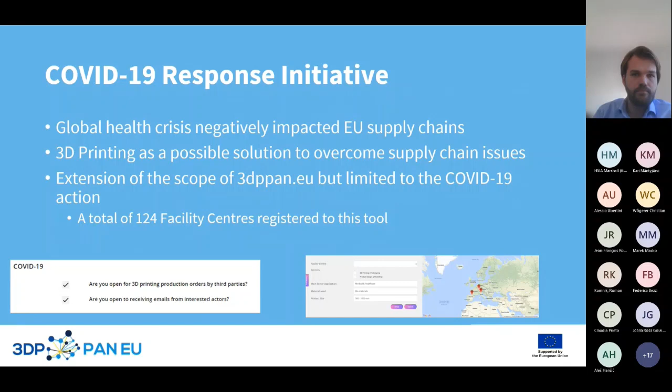As mentioned, we also launched and managed a call for SMEs to financially support SMEs in their industrial projects. We launched the call itself on the 15th of April and closed on the 31st of August 2020. So we were open for about 6 months. The aim of the call and the projects themselves was to test and validate a number of industrial demonstration 3D printing projects in different application fields. At the time of closure, we had received 30 applications, of which 10 were financially supported following an evaluation process.

It's noteworthy to mention that the SMEs active within these projects are coming from 5 different member states, and the facility centers who are part of their implementation consortia, who are also registered on the 3DP PanEU platform, came from 10 different member states. So all in all, with these 10 projects, we had a nice geographic distribution and representation from organizations based in different countries. You'll be receiving more information on some of the projects that have been supported through 3DP PanEU. But just to give you some insight, some of the application fields included the agricultural, automotive, aerospace, manufacturing and construction sectors.

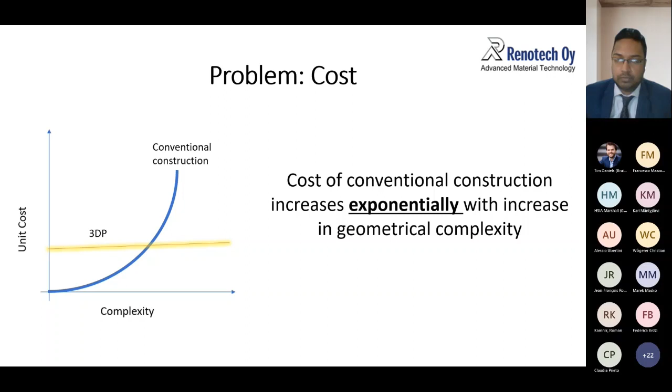Given these three challenge areas, we need some sort of solution. We believe part of the answer is construction 3D printing, but with smart materials. Compared to subtractive methods, you can produce items with minimal waste. For certain items, the combination of smart geometry and smart materials gives you completely new products with new functionalities.

Another example is bioreceptive materials, which can act as a carbon sink and bring down the overall carbon footprint of the finished products and items.

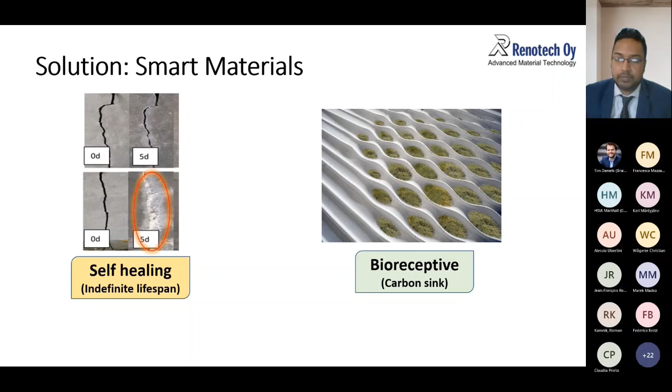So what we have done under this framework in this project, first of all, I'd like to highlight that we created a lot of proprietary designs. Since they're proprietary, I cannot share them openly. However, for the sake of this presentation, I can share some things in terms of design and the final products.

The printer which was under consideration was a robotic arm one, and the final items were marine items which had complex geometry and specialized material. These were bioreceptive, meaning the design had ecological and bioreceptive properties, as well as the material having advanced functionalities.

Some of the use cases we are aiming at are artificial reefs and shore walls. These are some pictures you can see. Of course, we have not produced them ourselves, they have been taken from the internet, but this is what we are aiming into, the marine applications, for instance.

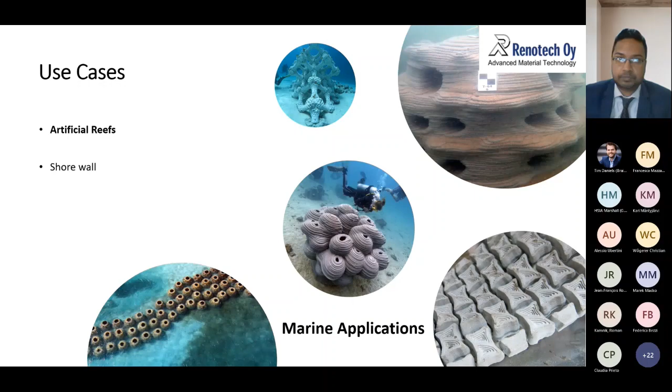In the future, we want to develop our terrestrial application, for example, making theme park units. We have gotten very good, creative designs, and also small office buildings, pillars and other things, but this is for the future.

So the vision and the project traction. Our vision is to become a leader in specialty construction 3D printing in Europe with focus on smart building materials. As we are an advanced material technology SME focused on specialty construction, we believe this gives us a unique value proposition in this new era of Industry 4.0.

To give you a brief idea how the project proceeded: the 3DP PAN program started in January, and by the end of May we had created a new business case incorporating the previous slides you've seen. By that time we had the majority of the designs, specifically the bioreceptive designs and other hybrid manufacturing items, already received. By the end of September, we reached TRL 8 for the marine items, so we can already get started.

So our team, the key leadership people are, for instance, me, I'm the project manager and technical lead in this area. We have Mr. Bob Talling, who is the owner and the managing director. And we have Rika Danielsson, the lady, who is a production manager. In total, our company has about 14 staff and we are growing.

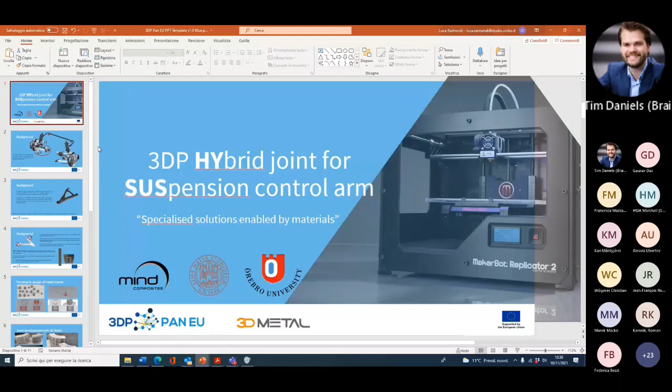Good morning, everybody. Let's try to share the screen. Hope you will be able to see. Okay, so good morning, everybody. My name is Luca Raimondi from the University of Bologna. I was involved in the project 3DP HYSUS for the demonstration of a multi-material component, that is a suspension control arm for the automotive industry. Co-partners in these activities, for which MIND is the SME, are Orebro University and the Facility Center 3D Metal.

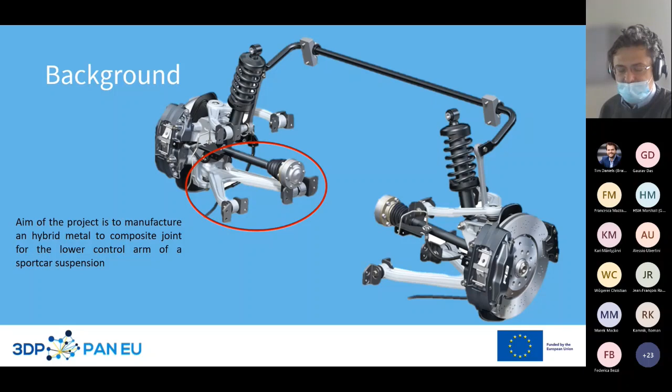So basically the background and the aim of the project was to manufacture a hybrid metal-to-composite joint to be integrated into the lower control arm of a suspension for a sport car. The background: the company, the OEM, actually produced this component in aluminium, but to improve the drivability of the car and in order to achieve a weight reduction of the unsprung masses, carbon fiber reinforced plastic has been recognized as a good candidate for metal replacement.

And according to a feasibility study performed by the OEM, this weight reduction can be achieved quite easily. Basically, this control arm is already produced and is already mounted, the version in carbon fiber, in several cars already manufactured.

Basically, in both aluminium and CFRP control arms, the steel bushings are press-fitted into the seats that are the holes presented in the control arm. This operation is crucial because the connection between bushings and the control arm is obtained by friction only. For composite this is quite tricky because this operation may induce fatigue, wearing, as well as corrosion in the assembly.

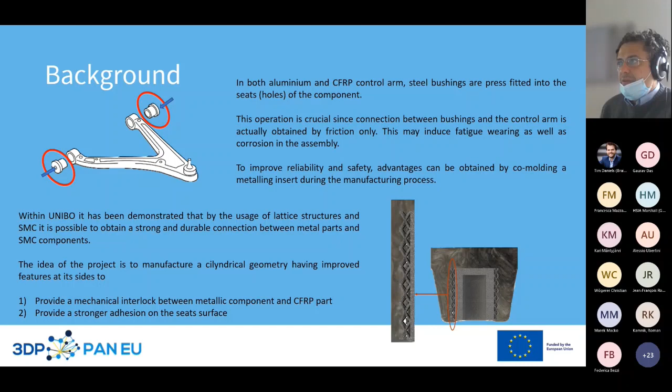We have developed new design tools for designing lattice structures on real automotive metal inserts based on a parametric design approach.

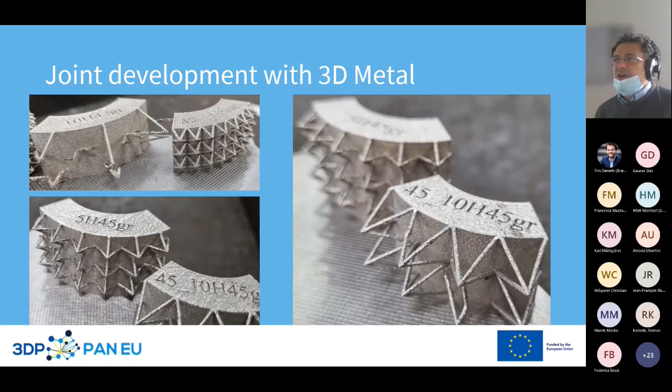Thanks to the joint collaboration with our partner, 3D Metal, another facility center involved in the project, whose task was to print the metal insert, we were able to understand the major limitation of this technology with regards to the application it was designed for. By performing this joint development, we have achieved some results in qualification of the process and the defects that are actually the bottlenecks to a widespread diffusion of 3D printing technology in the automotive industry.

We were able to embed these defects already in the design phase in order to achieve a strong resistance despite the presence of defects.

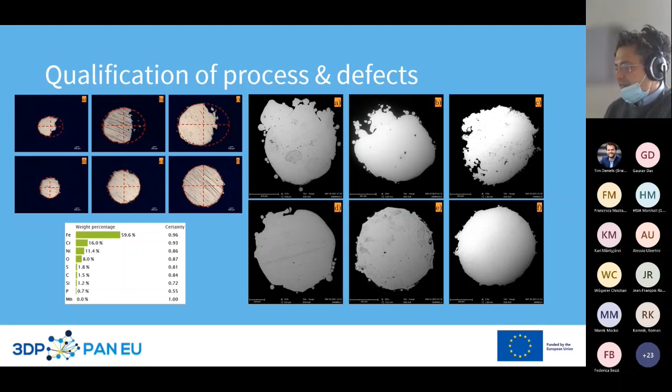We have performed some simulation of the infiltration process using commercial tools, and we have proven that our design is really interesting for the application and is feasible from the technological point of view.

Unfortunately, due to some issue in the supply chain, the pre-preg was only received yesterday. So basically, the project was not able to fully demonstrate the achievements up to now. However, we are confident to conclude everything in the next weeks.

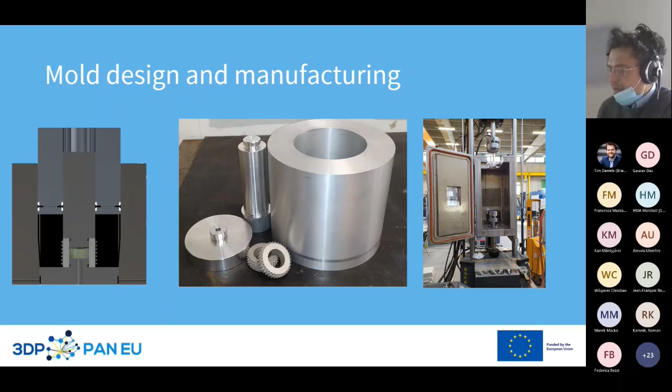By means of the computer tomography that will be conducted at Örebro University, we will also be able to understand the major limitations of 3D printing technology when used for manufacturing hybrid metal-to-composite joints, and to understand which failure mechanisms will dominate the joint while loading.

Therefore, this will be very interesting for scaling up the technology and surpassing some obstacles that exist in the automotive industry, which are mainly based on some concerns about 3D printing technology. So thank you very much for the attention.

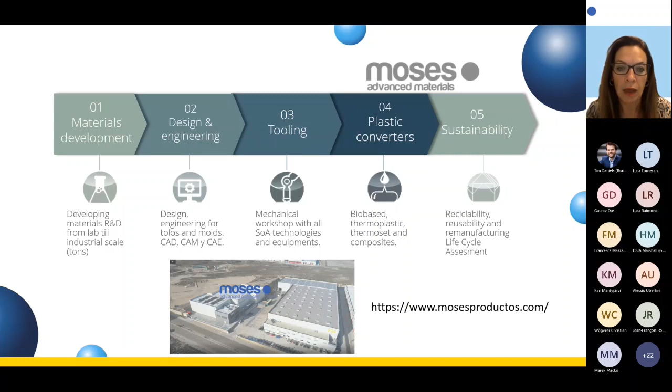Okay, we go directly now to the issue of our case. This is a problem that our team saw some years ago. You can see here how our regional government in Aragon funded a project in order to analyze the risk of fires caused by agricultural machines during harvesting times. Okay.

We can see, for instance, here a video that perfectly shows us the impact of this kind of accident in the field. We have here as well some reports coming from the University of Zaragoza, University of Navarra, and a private foundation, MAPFRE, that were our main starting point in order to conceive the concept of the product that we finally developed.

In Spain alone, we have 28,000 combine harvesters, and I'm mainly focused on 3 regions: our region, Aragon, Castilla y León, and Castilla-La Mancha. The main origin of fires is the cutting bars, with 31%. The ignition temperatures of the residues accumulated in the machine are in a very wide range, 250 to 340, depending on the size and the thickness.

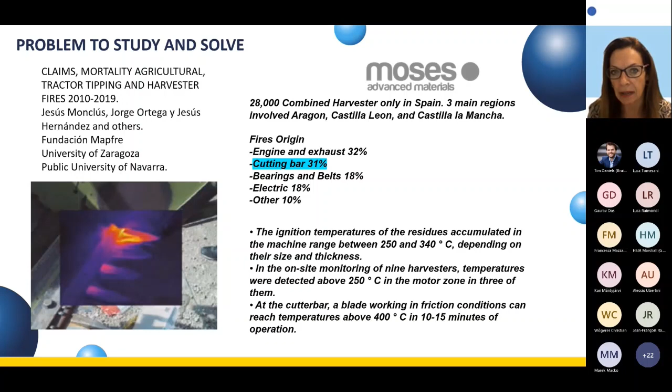And we notice as well very high temperatures in the motor zone, mainly in three zones, and mainly in the cutter bar, like this piece. We have very high temperatures, around 400 degrees during operations of 10-15 minutes. More studies about forest fires in Spain during these years.

And finally, we found a way to have a proof of concept in order to check if we could print a part directly, okay, from the file to the product using 3D printers, to check that it's enough for the mechanical performance that we need. We didn't have a successful result, but we learned a lot about the way to produce a new concept of plastic product instead of metal during the project.

Basically, AGRIAM consists of using metal additive manufacturing technologies to manufacture injection molds for producing plastic parts with conventional processes like injection molding for the agricultural machinery sector. Moses needs to respond to this high-impact market need by manufacturing small batches in order to check if the performance of these highly customized thermoplastic products meets the needs of the project.

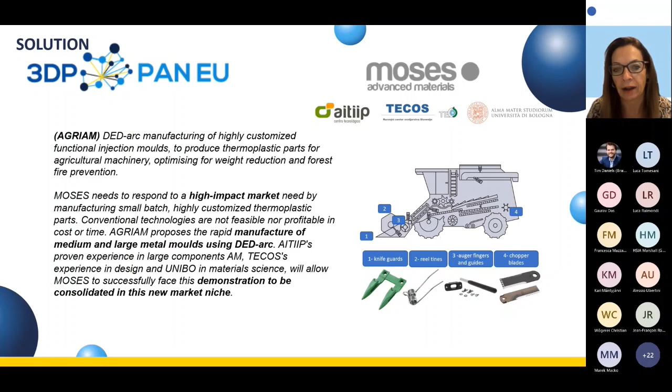Conventional technologies are not feasible nor profitable in cost or time. So AGRIAM proposed the rapid manufacturing of medium and large metal molds using direct energy deposition, DED arc. Of course, together with our partner centers, in this case, we work with AITIIP, TECOS and UNIBO, TECOS in Slovenia and UNIBO in Bologna.

And we developed these 8 activities, from the product redesign to the mold design for this AM manufacturing technology. We generated the trajectories and printing program for this case. The 4th activity was to design the different elements of the tool in order to be manufactured with this hybrid manufacturing, combining DED arc and subtractive technology.

Finally, we prepared the tool, adjusted it, finished it, and went directly to the injection trials in order to carry out the production of small batches with the selected thermoplastic material with a very high amount of fiber in order to be aligned with the mechanical needs. Finally, of course, we tested these samples and these tools with mechanical tests and with the different materials used in these batches. And we prepared as well a life analysis, mainly strength, robustness, and durability with 1000 cycles.

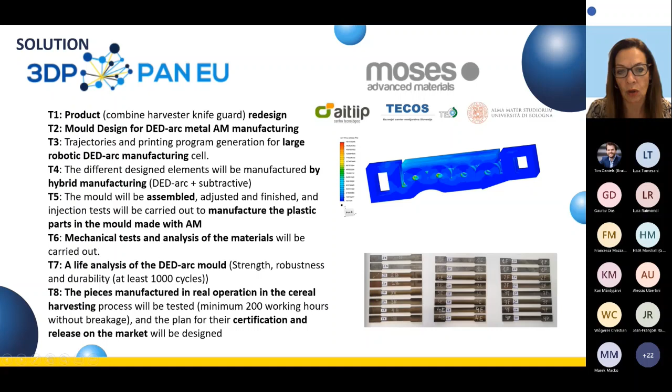Finally, as the real proof that it is a very good solution, we prepared parts in a real operation scenario in cereal harvesting processes at different sites, okay? And finally, we reached a plan for the certification of this new product, and we are now connecting to the market to have this product ready for next year.

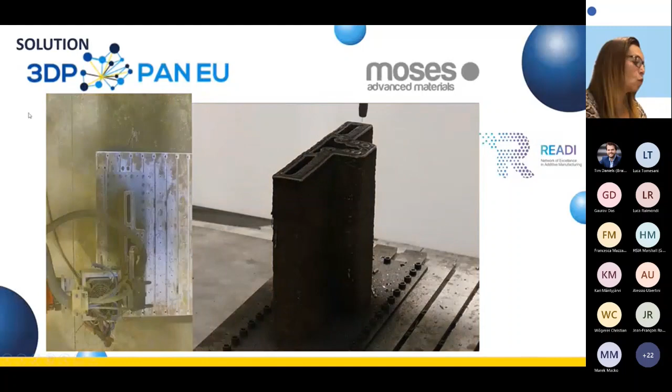In this video, we can show the production of this part of the tool, preparing this tool to produce the injection of the parts. Here you can see as well a sample of one of the parts of the tool. This was the first trial that we had.

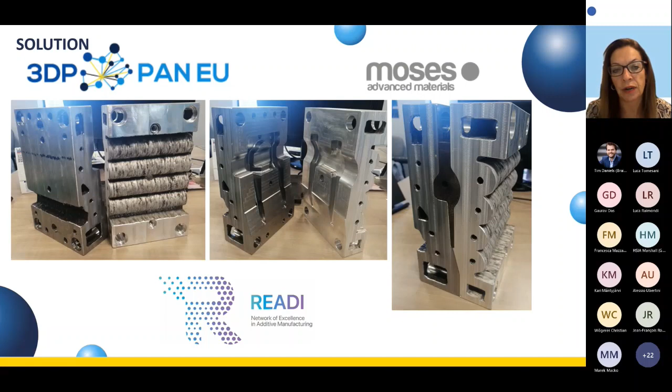Okay, and here you can see some pictures of the male and female part, the both sides of the tool, designed and manufactured by WAAM technology. Finally, you can see here as well the part of, we put the tool in the injection mold machine. As you can see, all the connections for the cooling process of the part inside the tool and the machine.

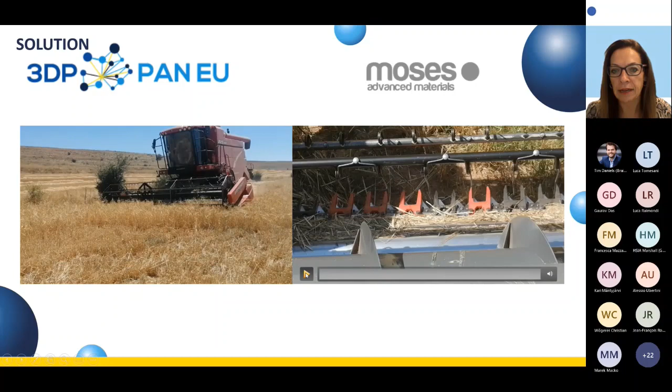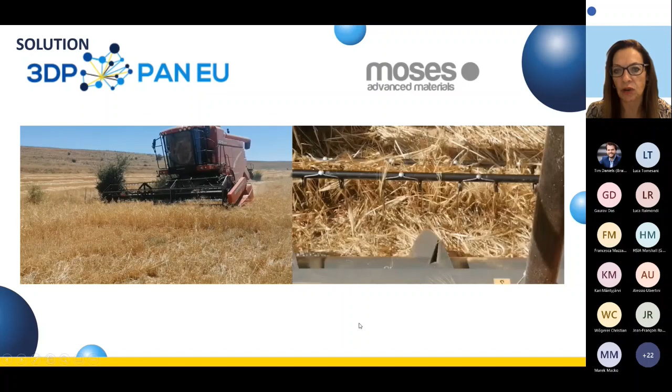As you can see, the mechanical efforts that we get in this manufacturing process, in this process of harvesting. You can see here some pictures of the parts that we implement in these machines. As you can see, we only replace some parts, mechanic parts, metal parts, not all the line. You can see in the middle a complete line, but in other cases we proved as well the combination between the conventional ones and the new parts that we prepared in this project.

Finally, I would like to thank, of course, this project, the 3DP PAN EU support that was essential to develop these parts, this solution for a real need. Very fruitful cooperation between AITIIP, TECOS, and UNIVO, thanks, of course, to all the teams in these facility centers to develop this solution, this new process, this new product. New knowledge creation, very good point as well, and of course, new research and development opportunities for the near future, and to optimize this product in the market.

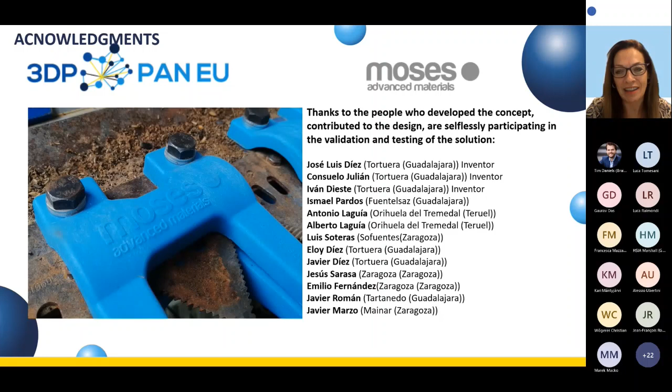Of course, a list of our testers, the people that test these parts in a real scenario. Thank you very much.

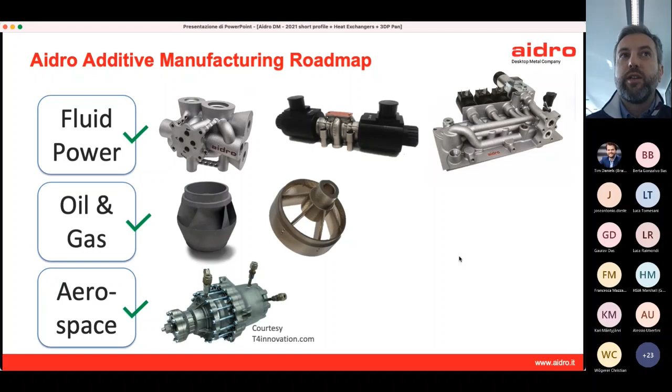So we defined a sort of roadmap for additive manufacturing. As mentioned, we're mainly focused on the use of additive manufacturing in fluid power, but also in oil and gas and aerospace. The idea behind is that we can use the advantages of additive manufacturing in order to introduce innovation to very consolidated and standard products like the valve that you see here in this picture.

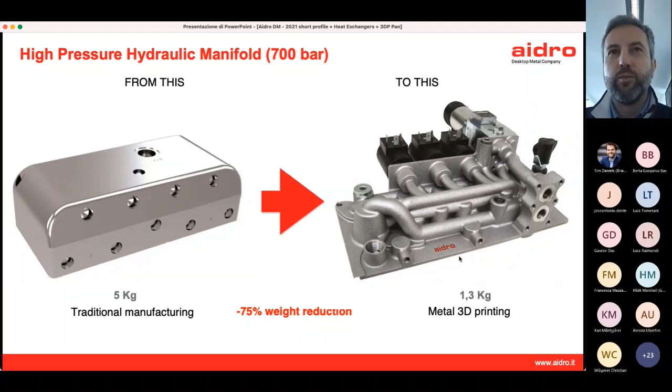Through additive manufacturing, we prove that it's possible to reduce weight, increase the performance, and have a series of advantages, in general for very niche applications, where there is a high added value and a customer that is keen to pay for the extra costs normally related to additive manufacturing processes. For example, this is another case of application for a hydraulic manifold that has been completely redesigned starting from a hydraulic scheme and has been adopted on a racing boat.

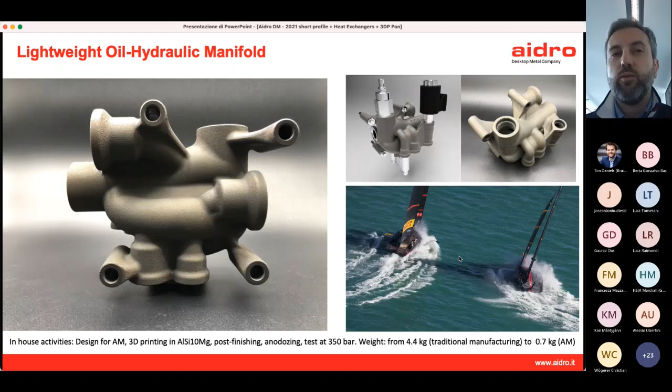Weight saving was crucial, so we proved that by using 3D-printed aluminum, the performance of the manifold was very efficient and the weight saving was important. Of course, weight saving also goes with the reduction of CO2 emissions, which is, I would say, a very fashionable theme recently, but we proved by a study that it is really possible to reduce the CO2 footprint through additive manufacturing, because on one hand we reduce weight and on the other we reduce the number of components.

And we can also think about the digital inventory, so reducing the physical stocks with the files. And this is something that is becoming more and more relevant.

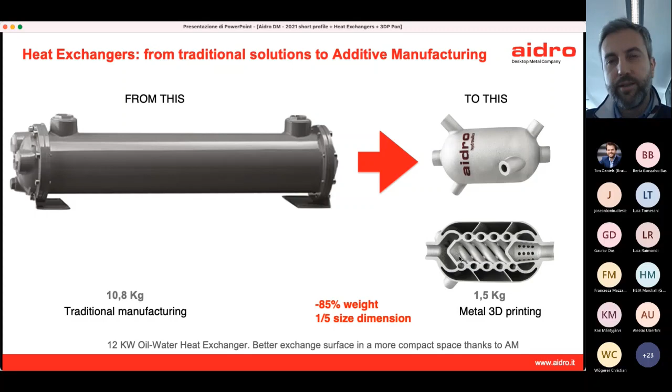Concerning the heat exchangers, the idea behind was to switch from a traditional manufacturing technique, normally made of plate, fin, or tubes, into a new structure, a monolithic structure made of melted metal powder, and of course exploiting the advantages that additive manufacturing can offer in terms of complexity. So those are some examples, but maybe I can go directly to our project.

So we used the so-called gyroid surfaces. Those are so-called minimal surfaces, the ones that optimize the surface for a given volume, so they can provide a better heat exchange. This is something that, of course, is only feasible by 3D printing and not by traditional manufacturing.

There are libraries of this kind of surfaces, but what we wanted to do in this project was to introduce a variable porosity into our device, meaning that we wanted to change the frequency of the gyroid surface in order to have a better performance on the device. So the target was to have higher heat exchange while keeping the pressure drops low.

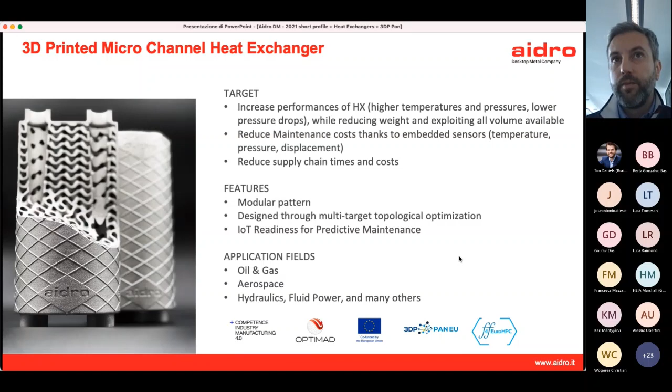So we started by using the facility center Optimad Engineering that helped us in modeling the heat exchanger. Starting from a version where the gyroids are fixed in terms of frequency, it has been possible to model and simulate the behavior from a thermal and fluid dynamics point of view.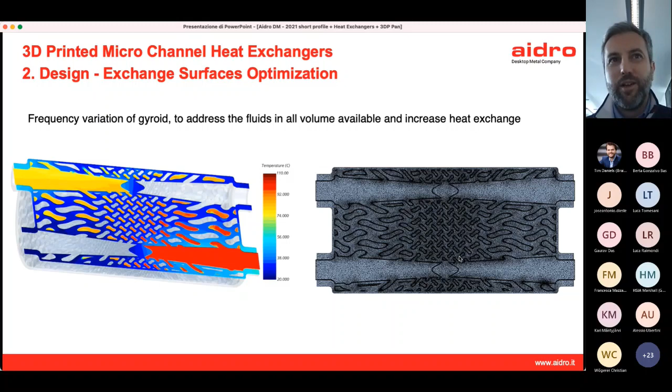Then the second step was to change the frequency of the gyroid surface in certain zones in order to have a controlled flow. So in this picture you see that there is cooling water and hot oil. So the idea was to cool the hot oil with water. And indeed, we proved that not only was it possible to model this pattern, but also from a simulation point of view that we could have a better behavior in terms of heat exchange.

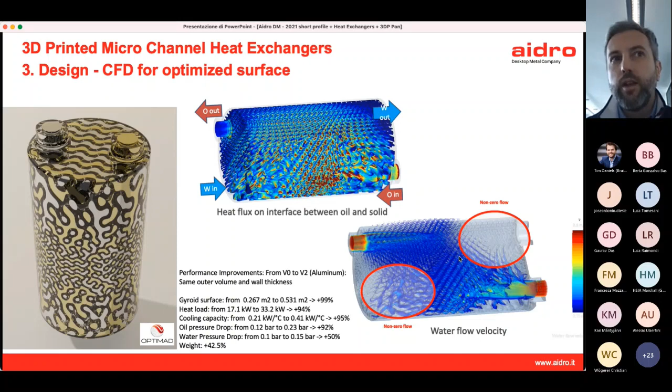And this design activity was quite a sophisticated one. The technology center relied on high-performance computers and used specific tools for the design. And this was a sort of first step for us in order to introduce the possibility to change the frequency of the gyroid in a controlled way, in order to obtain what we call a controlled porosity device.

The second part of the project was to prove the printability of the solution, because of course you can design everything, but in the end something has to be realized concretely. So we printed some samples, some sections of the device. One was done in copper alloy and another one in aluminum. In those pictures you see that there is indeed this pattern which changes according to the zone where we wanted to address the flows.

The other very important topic in this project was the possibility to depowder the device, because in a laser powder bed fusion process, the metal powder remains trapped in the voids and has to be removed. So we tested finishing, an electrochemical treatment for depowdering, which can also be used for reducing surface roughness, but that was not our intention here. Here we wanted to ensure the cleaning of residual powder inside the device. And the first attempt was successful, and we measured that through computer tomography.

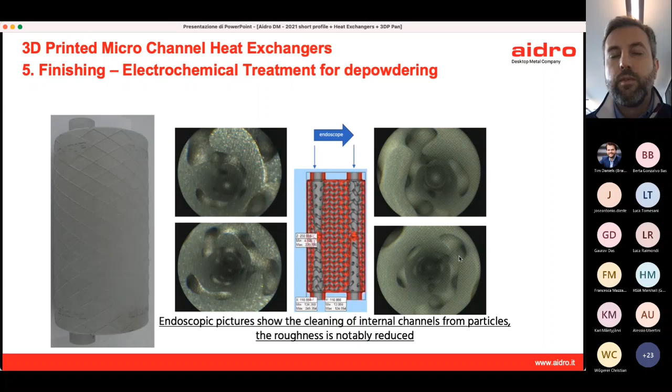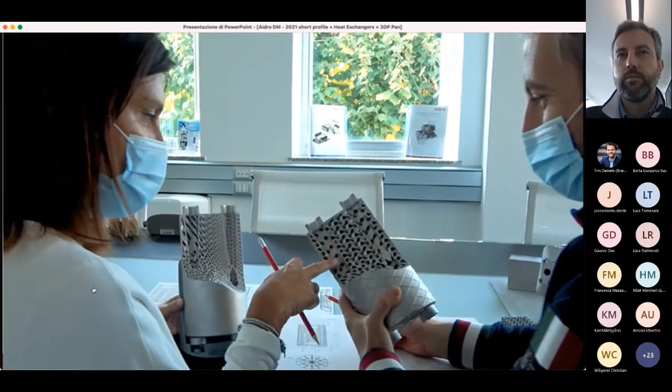And I just want to conclude with a video that we prepared for this challenge. We renamed the project Toucan Beak. Toucan beak is an example of topological optimization by nature. Its structure is very lightweight, but at the same time stiff, thanks to a controlled and variable porosity. Moreover, it integrates multiple functions, including a controllable vascular heat exchanger.

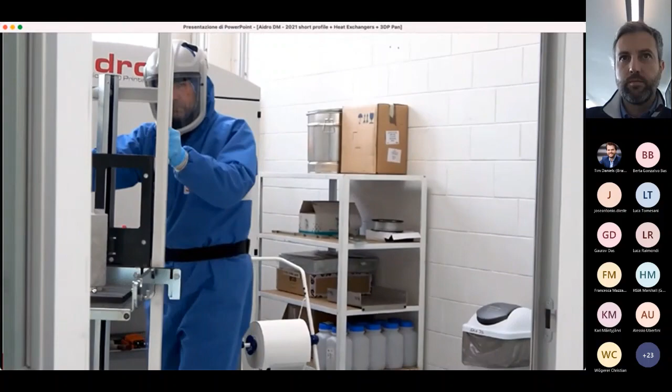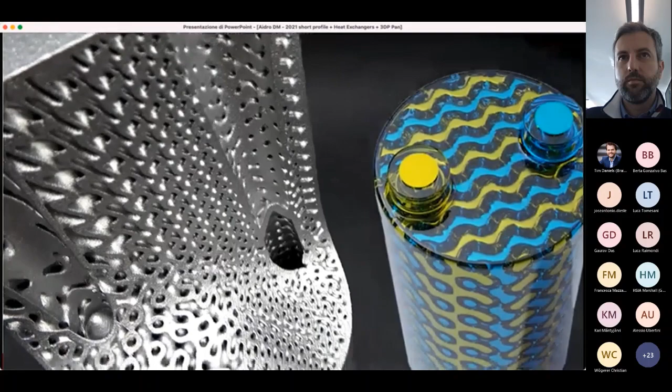Our project is based on metal additive manufacturing. Thanks to this technology, we can produce innovative surfaces with improved performance for heat exchangers. Our approach is a multidisciplinary topological optimization with advanced simulation tools, machine learning, and high-performance computing deployments.

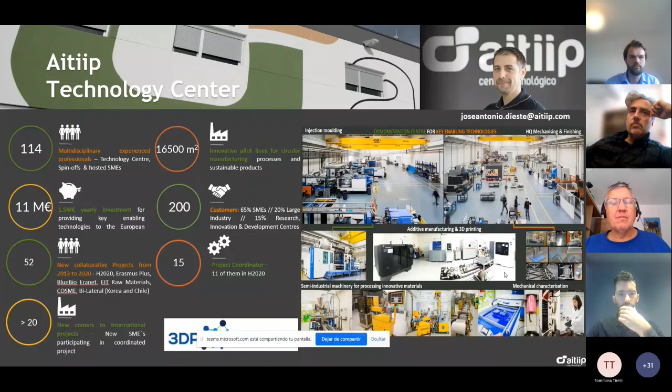We are making a lot of European research projects. In this case, we have been making 52 European projects, and we have been coordinating 15 of them, 11 in Horizon 2020. And the main thing in this case is that we are very close to the industry, to the SMEs. We have more than 200 industrial partners per year, and 65% of these companies are SMEs. So we are proud to be a technology center quite close to the industry and to the final needs.

So these are our main research lines: advanced materials, efficient manufacturing, circular bioeconomy, and digitization. All of them have to be integrated and joined in order to make developments and services in additive manufacturing.

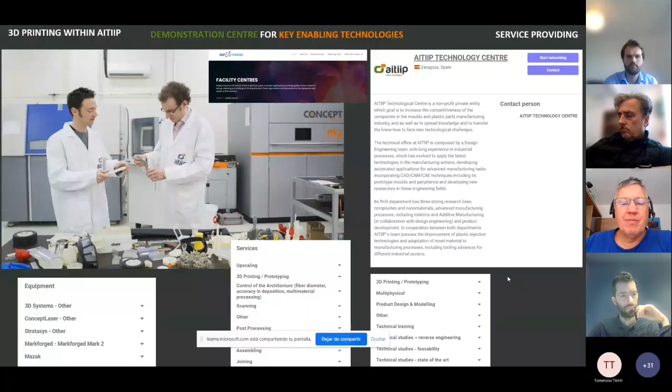Regarding our expertise and services, I took this picture directly from the 3DP PAN EU matching tool, which we consider very interesting for promoting our expertise and linking it with the requirements and needs of the industry. This is directly taken from the matching tool developed for the project.

Thank you very much. It's very, very nice and very useful for us.

You can see that we have quite large equipment in additive manufacturing. We have our lab with different machines, working with different materials, metal ones and polymer ones. We have very large industrial 3D printers, and we can provide quite a lot of services for our SMEs.

I wanted to align a bit with one of the presentations you've seen, the Moses one. Apart from the services we provide, we are also working in research, and we've had quite large achievements during the last year. Now we are working to provide the industry the possibility to print large parts. That is one of our main intentions, so we can print polymers and metals in large formats.

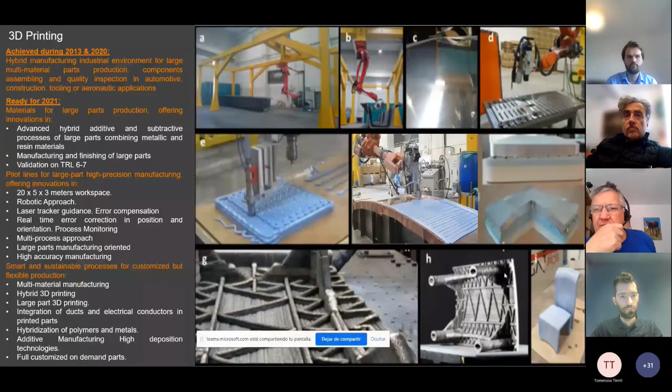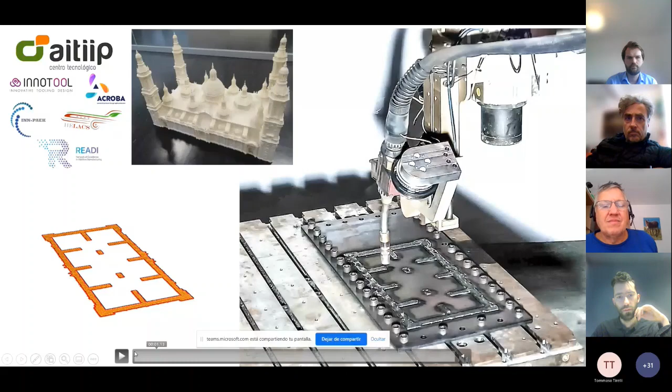I wanted to show you this video - it's the same prototype, but this time made by the ARC one process. We have been working on printing very large formats. We are able to print 20 meter long parts, providing a large amount of material, in this case 5 kilograms per hour. That's one of the things industry requires to make 3D printing profitable for them.

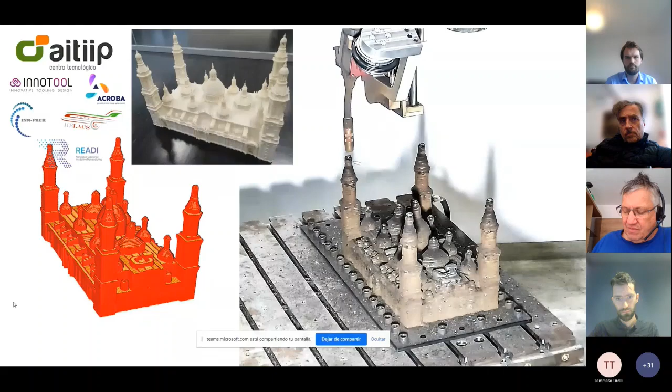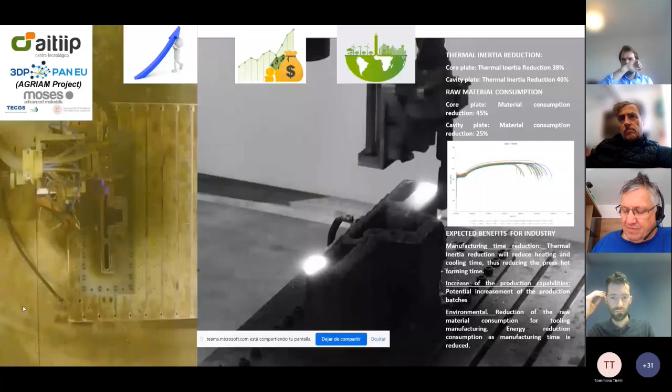This research we have transferred to the AGRIAM project, and you have seen this video shown by Berta. It's the same technology, the same approach, but this time made to demonstrate large scale manufacturing for injection molds. It has a large impact because it can be used in several applications and industries, not only for building the tools but also for the final process.

In this case, the main thing is that raw material consumption is reduced. We have saved 45% of the material compared to if it was done in the conventional way. We are reducing the thermal inertia, which is very important for some applications. We've been watching Hydro and Moses - in both cases the thermal performance of the part is important, and we are profiting from 3D printing for this application.

For the industry, it's important to reduce this time to market, also for printing the tools, increasing the benefits for the SMEs. One very important thing is to reduce the waste, reduce the amount of material, and reduce the energy consumed for the products. So thank you very much.

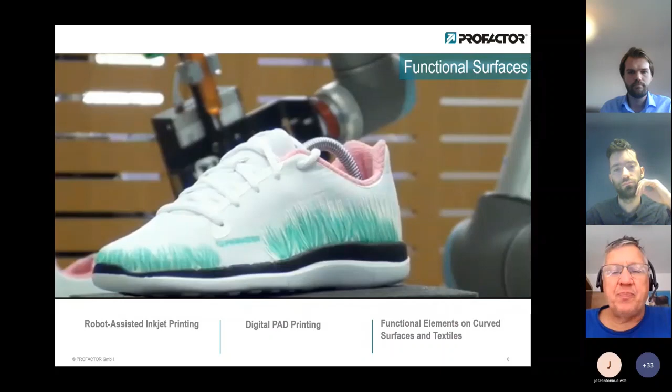What are our main fields: robot-assisted inkjet printing. Here you see a demo from a sport shoe. We are not focusing on decorative printing, more on functional 3D printing, functional elements on curved surfaces, textiles, and digital PAD printing. This is our main focus - you see a picture of the robot-assisted printing, a technology we are still bringing into the industry, mainly on textiles and so on.

What we have done in the last years is go from 3D printing flat surfaces to curved surfaces, first smooth curved surfaces, then extremely curved surfaces with a robotic-based solution where the inkjet head and the curing system are mounted on the robot. We are printing with various materials, with industrial partners, with electric conductive inks and so on, so we have a lot of solutions.

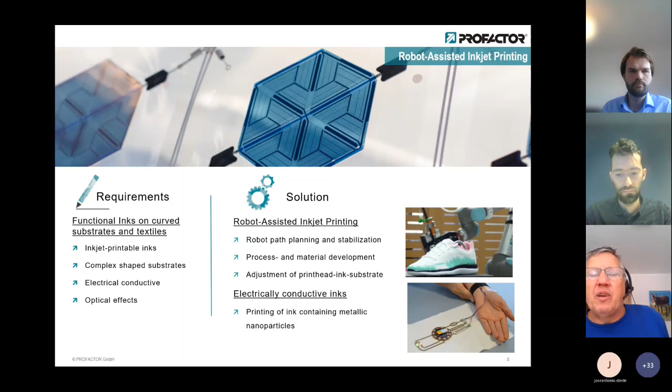What we can provide as infrastructure, I think Tim, you wanted an idea of this. We have a lot of open labs, a cognitive factory, an open mobile lab, and 3D printing facilities are available - a cognitive robotic and factory hub lab where the inkjet-based robotic infrastructure is available.

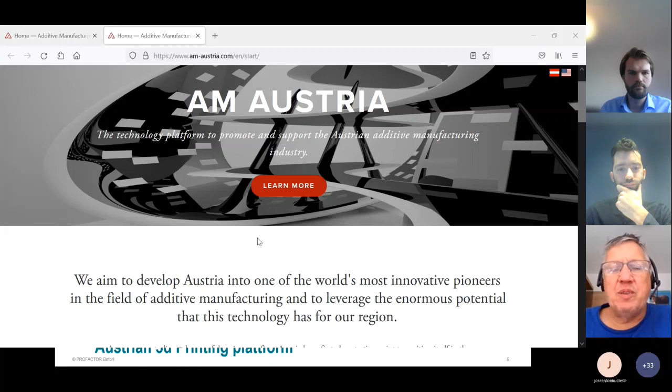What I want to present, talking about infrastructure, is that in Austria we have the Austrian 3D printing platform, AM Austria, and I briefly want to show you their homepage. Here you can find a consortium of almost 60 partners and access to all possible 3D printing facilities you need. Austria has the highest density of 3D printer manufacturing in the world - maybe that's because we are so small.

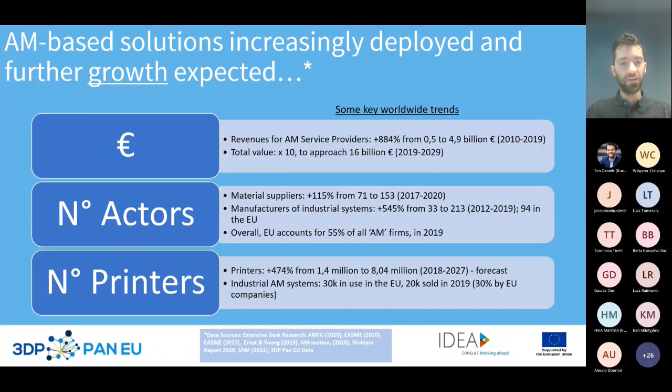So what we can see here is that there was important growth in the overall AM market, with very important growth expected for the coming years. But these big trends hide some very interesting peculiarities in the market. By that I mean that in additive manufacturing we have well-deployed solutions - that's clear - but this is a really highly dynamic, still very growing market, also with applications and solutions that are at quite low TRL. So you have this high dynamic in terms of solutions being deployed industrially, but also new solutions emerging at lower TRL that need co-development with activities from facility centers in cooperation with industrial actors. There are a lot of different technologies and materials available, a lot of connections with other digital technologies like robotics and so on. So you have this highly dynamic market with solutions being developed in a fast-moving way.

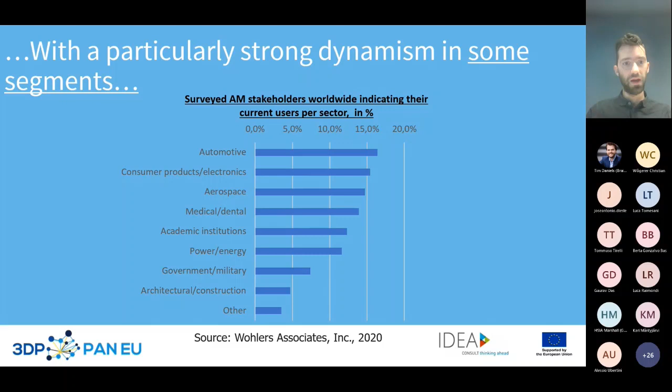Let's dive into these different segments to illustrate that diversity. If we look at the application areas, it's clear that in some application areas there is already quite high deployment of AM solutions. This is information from the Wohlers report, where you can see application areas and sectors where additive manufacturing solutions are most deployed: automotive, consumer products, electronics, aerospace, medical, dental. These trends are to some extent confirmed by the searches made on the 3DP PanEU platform, where you find these same sectors in a different order, because here it's more about demonstration activities at lower TRL, but still the same sectors coming back.

But I think what is very important to mention here, and this is based on desk research and on analysis of the 3DP PanEU data, is that you have emerging segments where additive manufacturing solutions will be key in the future, but they are not yet fully deployed. We have listed a few examples here that are both within the sectors where additive manufacturing solutions are already well deployed, but also outside. For example, and we had examples already through Renotec, the construction sector. We expect big growth of additive manufacturing in the coming years.

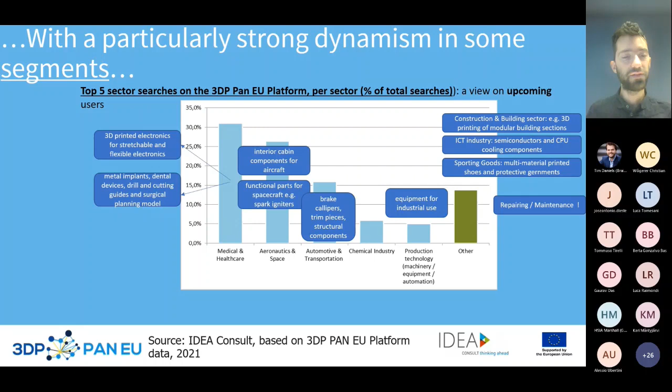ICT industry with some specific segments, sporting goods as well, the overall repairing maintenance using additive manufacturing, but also segments in automotive, for example, with structural components where additive manufacturing will be more and more used, also functional parts for spacecraft in the aeronautics and space, and some specific segments in healthcare and medical devices.

So now if we take a bit more distance, let's understand why 3D printing solutions, additive manufacturing solutions, have experienced such a high growth in the past and are expected to be more and more deployed with new, innovative solutions. With really a helicopter view, it's because additive manufacturing has and will have a very crucial role in instrumental transitions in the manufacturing sectors. And these transitions, the role it can play for these major transitions, relate to the smart transition, so smarter manufacturing, green transition, more sustainable manufacturing, and a more resilient and competitive manufacturing industry.

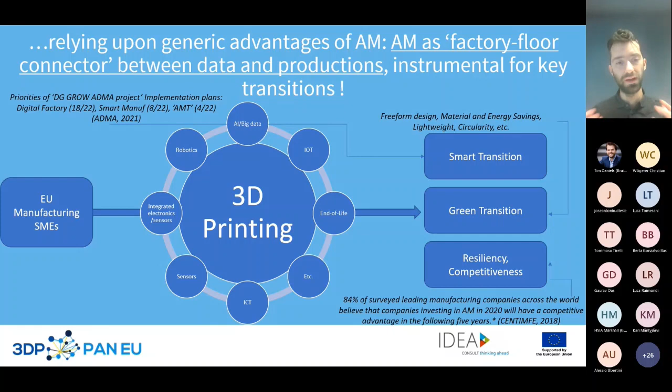For all these transitions, additive manufacturing has a lot to offer: freedom of design, material and energy savings, lightweight, circularity in terms of green transition, and many other advantages that, of course, you know well. And why is it so? Here I would like to point out one really key and instrumental characteristic of additive manufacturing: it's really some kind of integrator between data on one side and tangible products on the other side. So it can really integrate advantages from a lot of aspects like predictive maintenance, but also end of life, freedom of design and so on, to really contribute to these very important transitions.

So now one might wonder, given all these advantages, why additive manufacturing is not even more deployed. But it's quite simple. It's because when you take the perspective of an SME, especially downstream SMEs that do not know exactly what are the advantages of additive manufacturing and how to really uptake additive manufacturing solutions, there are a lot of barriers that remain. I will come back to these barriers later, but they do relate to a lack of awareness, still technology developments to be made, especially looking at reducing costs, improving reproducibility of the parts, so a more automated process, integration of post-processing, also need for standards, certification, and other barriers that will be disclosed later.

So taking into account these advantages and the remaining barriers, we were able to put forward some key innovation areas that we think will be highly demanded in the near future. They are already now highly demanded by SMEs and in the field of demonstration activities. So these are innovation areas that can be grouped under key categories, like first, sustainability, recyclability of the AM solutions. So there are specific aspects put forward, like material research, design improvements, recycling capabilities. Also, lighter components related evolutions are very important.

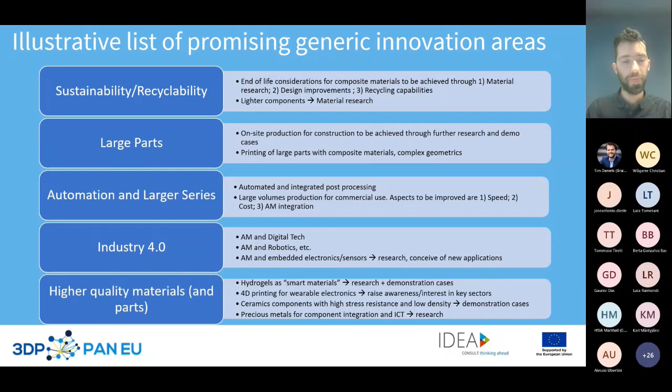So this was a brief analysis on the demand side. So it's clear that it's fast moving, with segments that are well deployed and segments that need to be further deployed in the future. So now let's look at what's there in terms of equipment and expertise in the field of demonstration activities. So for that, we can have a look at the characteristics of the equipment. And here it's about the 3D printing equipment that is available in Europe in our facility centers.

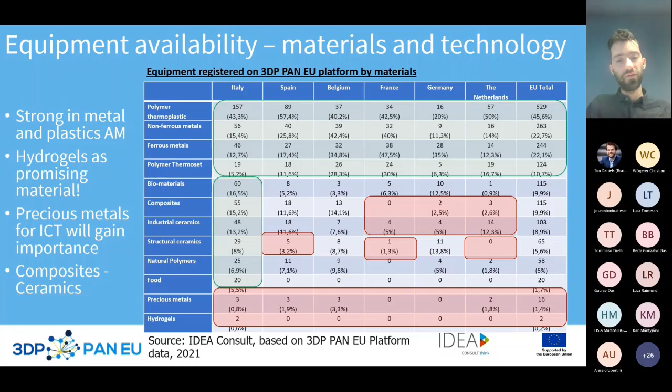However, when we think about the emerging materials that will be more and more demanded in the future, it's clear that we have less and maybe not enough equipment in some countries able to print and prototype parts in these materials, like ceramics, natural polymers, precious metals, hydrogels. So that's an attention point, and it really illustrates that we have much less equipment for that. It's very important first to connect and make available all this equipment in Europe, but also to think about investing timely in this equipment when it will be really needed.

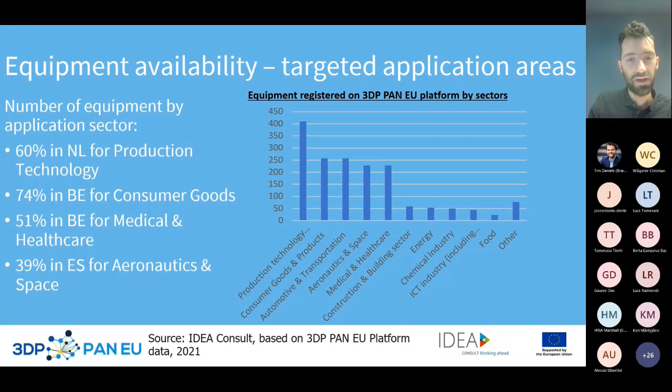And these differences do reflect the economic structure within the country. For example, many printing equipment in Belgium are used for medical and healthcare, and many in the Netherlands are used for parts associated with production technology. Other country-specific trends can be put forward based on this slide, but I will not have time now to go into the details.

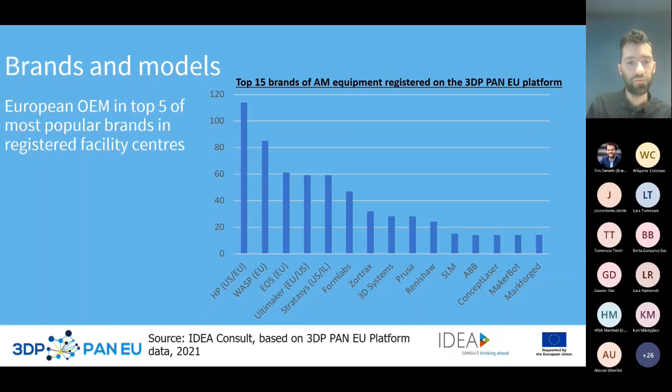We also have, and please look at the report for more information, information about the brands of the equipment. And you can see here the top 3 brands are HP, WASP, and EOS. So an important role for European companies as well there. And for your information, we were also able to go to the level of the models for each of these brands, and this information is available in the report as well. Software, not a big surprise there as well. Maybe an important point to mention is that we do observe some kind of gap in terms of software for advanced materials, so that's also an important point to be taken into account. These were for the printing machines themselves.

Other important aspects are technical studies that are also highly demanded by SMEs. There, what I would like also to point out is that technical training is something more and more important for SMEs, as mentioned also by your experts. In SMEs, you need also to have the skill to use the additive manufacturing process in a good way. Technical training is more and more important, and there may be a relative lack at the supply side to be taken into account in the upcoming years.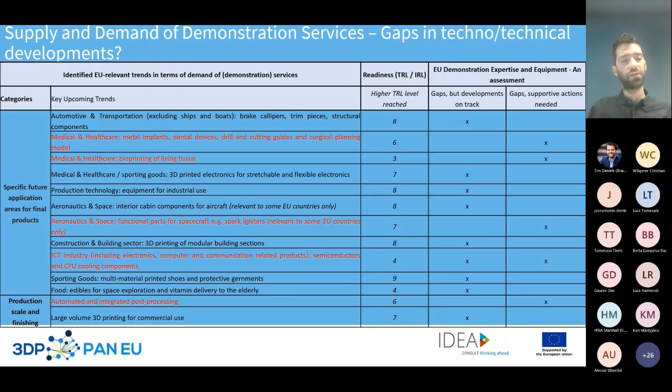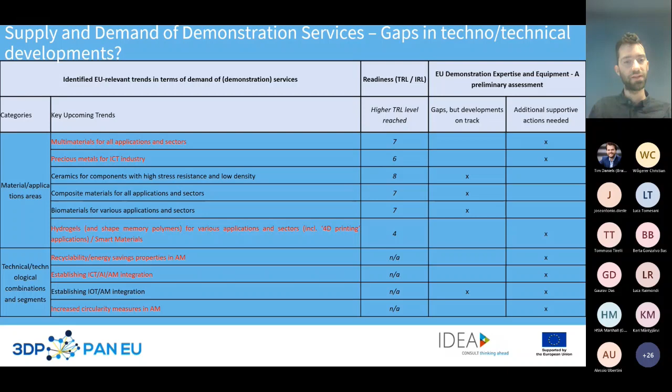So in red, you can see some key segments where it's really important. So some segments in medical and healthcare, aeronautics and space, as I already mentioned. Also segments associated to a more automated process, and in particular integrated post-processing. Segments related to multi-materials, precious metals for the ICT industry, and so on and so forth. They are all mentioned here, and I will get back to them very quickly later if I have time, but please have a look. Please comment also. If you see some missing segments, we can still integrate that into the final report.

So it's a sequence of steps that will enable an SME, and in particular a downstream SME, to understand what kind of solution can address the needs of the SME and to uptake that solution using the services of the innovation generators, universities, facility centers, and innovation disseminators. What are the key remaining gaps in the additive manufacturing landscape? So first, we need more tailor-made information about possibilities, limitations, and implications of additive manufacturing solutions. A lot of SMEs do not yet have a clear view of what going additive can mean for them.

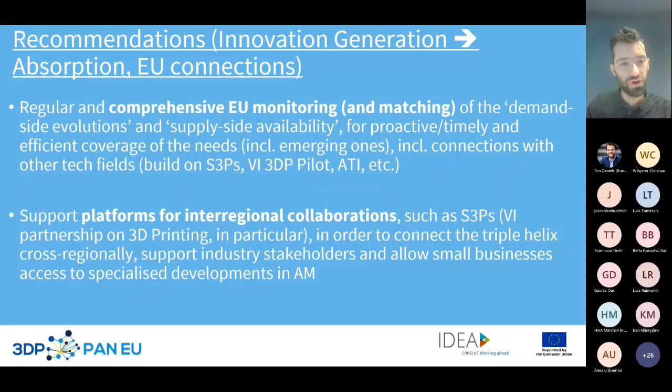To, let's say, have a smooth access across regions, what we do recommend is to continue and strengthen support for interregional collaborations, and in particular the Vanguard Initiative 3DP pilot, for example, to really make sure that there is this connection facilitated across regions so that SMEs can have access to these specialized centers where they can test and validate solutions. A lot of barriers associated to that remain connected to funding instruments.

So when it comes to funding instruments for activities at TRL 5, 6, 7, 8, there are instruments available, but there are still some gaps, and we do recommend in particular to have structural funding solutions being made available for cross-regional demonstration projects for all the reasons we explained before. There, some initiatives are being developed, like I3 by the European Commission. We hope it will indeed be a solution to these needs, but at regional level also additional work could be done to make sure regional funding could also serve cross-regional demonstration projects.

We do recommend also to have particular funding support for supply chain driven projects, so really to ensure that we do develop impactful projects in a supply chain, projects that do address the needs of OEMs, for example, involving tier 1, tier 2 suppliers, so that we do build really projects that will have big impacts because they do address needs of lead companies in the supply chains involving the suppliers, for example.

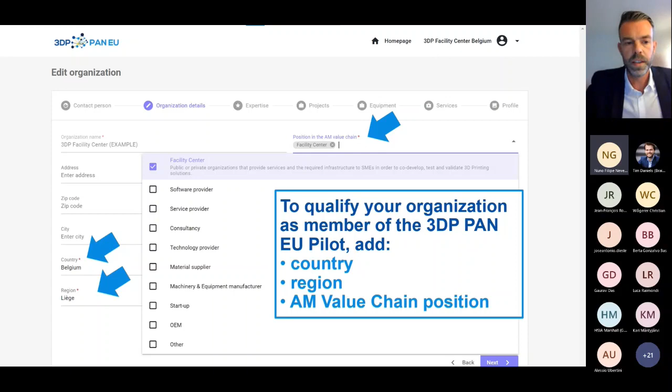Because indeed, Jean-François has also mentioned the Vanguard Initiative pilot project. That is one of the seven large-scale demonstration projects within this network of industrial regions. This is a membership-based association covering 32 regions, so quite a few regions today and still growing, which gives ample opportunities for companies and other value chain players to be part of this.

Enough talking. How does this work in practice once you're there, once you are going to the platform and looking for a solution?

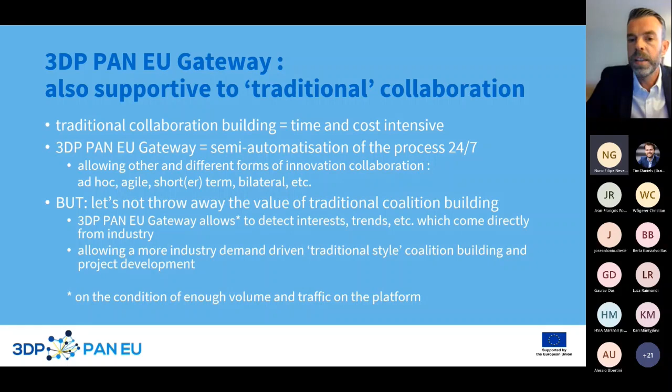But we don't want to throw away this way of working. We do count on the 3DP PAN EU Gateway to signal interest from companies and trends, such as the ones we have already analyzed through the report presented just before me. This will allow us to develop project building in a much more industry demand driven way than we may do it today.